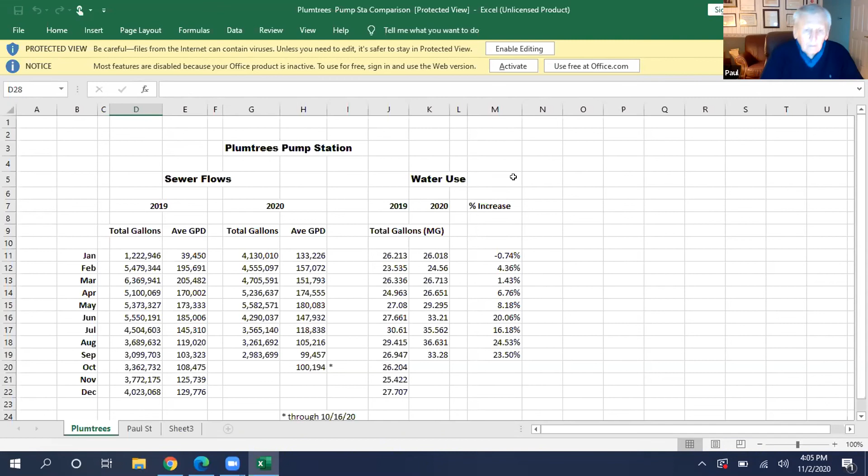Hey Tom, if I'm looking at that right, just use January for instance. We pumped in 2020, 4,130,000 gallons. Is that how you're reading that? Yes, divide by 31 and there's your average gallons per day.

But then over on the water use, is that per day or is that for the month? That would be for the month—that would be million gallons in that month. And again, that's system wide. I don't have the ability to equate only what's going on in Plumtrees; I'm just trying to show the trend in water usage, but that would be million gallons for the month.

All right, that's all. I just wanted to illustrate the flows. That's all. Okay, all right, thank you. Did you have anything else on your report this week?

Yeah, one other item I was tallying up—Kathy, you can move off that. I tallied up the dollars spent on our Greenwood Avenue water main break under the railroad tracks. Still not complete because we have to do the final paving. That's the last item to be done.

But to date, I've tallied up $162,573 on that episode. So I know, Rich, you had been asking about that. Yeah, and I don't have an estimate on the final paving, but obviously we're going to have to pave that to the state specs. Well, they're not cheap. Anytime you're dealing with a railroad crossing, I think Mariusz can attest on some other projects, the cost involved with doing a water main crossing is pretty substantial. But those are my two items on director's report.

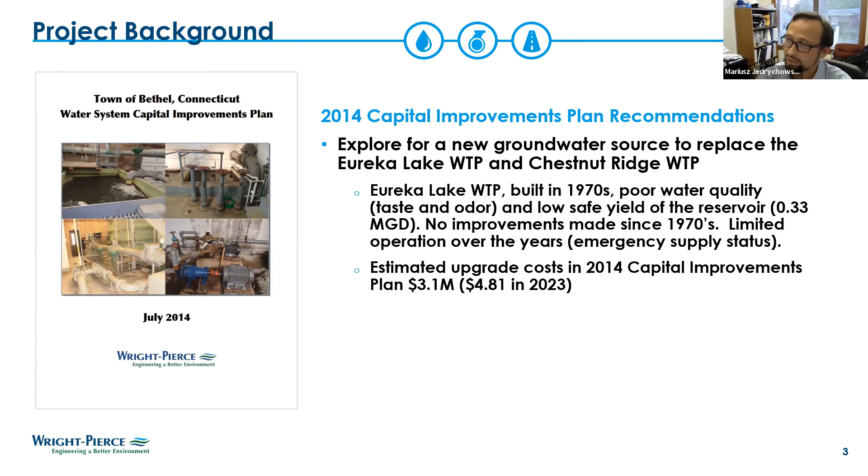In 2014, we estimated the cost to upgrade that plant to be basically $3.1 million. When you escalate the cost to the 2023 year, which is when the Bergstrom well will be online, the cost is basically $4.81 million just for that one plant to upgrade.

Similarly, the Chestnut Ridge water treatment plant was built in 1909, so again it's a very old plant. The building was last upgraded in 1970. Again, it has similar water quality issues, TTHMs. The reservoir has very low safe yield, only 0.17 MGD, so again very little water is available during drought condition, and that's what the state is looking at—how much water you have available when there's no rain coming in. Again, those reservoirs are very small, they have small watersheds. That's the key factor, which I'm going to talk about later in the presentation.

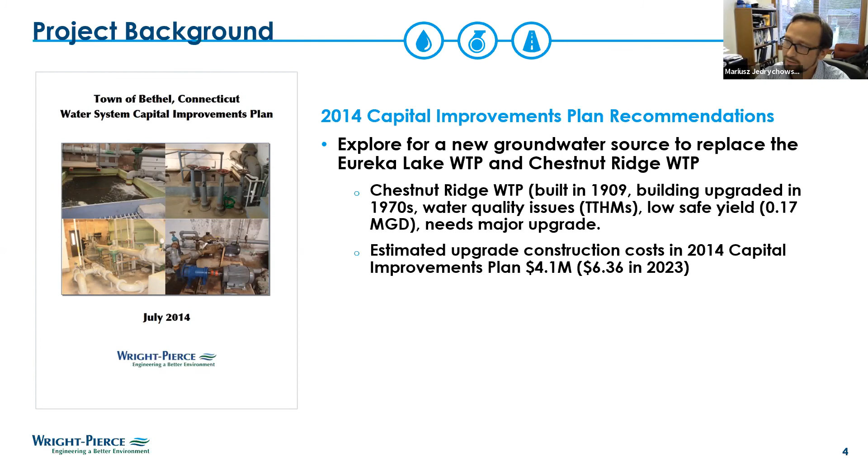The estimated upgrade construction cost that was estimated in 2014 was again $4.1 million. When you bring it up to the 2023 year, to make it equal with the Bergstrom well, it's $6.36 million to upgrade that plant.

So now, in 2014, we basically set on a new path to look for a new groundwater supply. We found a nice source of water in the Bergstrom field. The well was installed and permitted in 2019. It has a very high safe yield and capacity of 1.152 MGD—this is equivalent to 800 gallons a minute. So basically, the one well field would replace your Maple Avenue wells. Each Maple Avenue well is doing 400, so that's about 800.

The cost that we estimated right now is $7.67 million, brought back to 2023, and that includes 20% contingency for that project. However, that would supplement and provide redundancy to replace your treatment plants, but also supplement water to the Maple Avenue wells. But we found some iron and manganese in that source water, so iron manganese treatment is required to be able to run that plant.

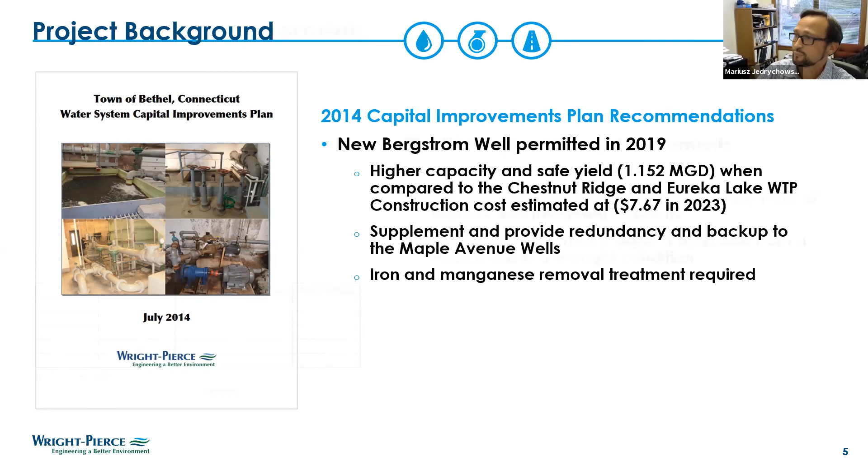Just to show you, we talked about some of the demand in town. This shows the water demand going back to 2010. As you can see, from 2010 to 2020, the water demand has been increasing—it's been going up in town. The 2020 demand is not complete; this is through September, and you can see the average day demand was 1.21 MGD.

Again, this is something that Tom alluded to—a lot of people were home, they were using a lot more water due to COVID conditions, but you can see the average day demand was 1.21 MGD. The maximum day demand in the maximum month in the summertime was 1.35 MGD.

And I guess the maximum day demand was 2 MGD. So again, that demand has been going up. Bethel is growing, there's new people coming in.

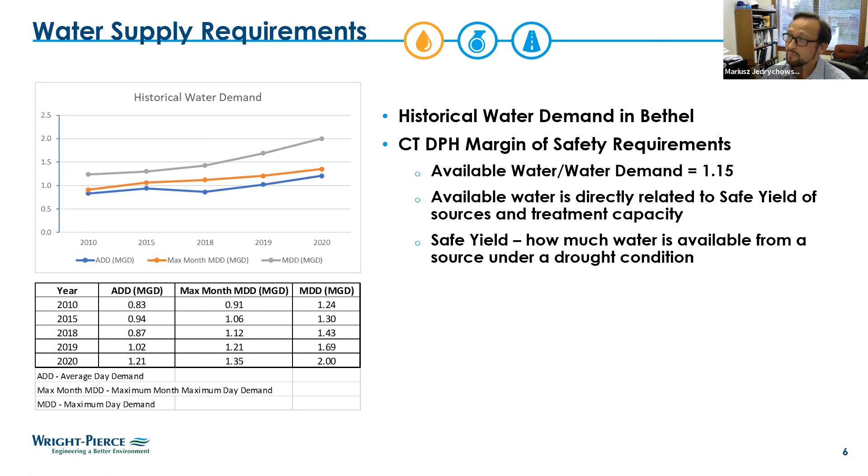So now, why is this important? Connecticut DPH requires water companies to maintain a margin of safety on your safe yield of 15%. That means the available water in your water system from the reservoirs and groundwater, divided by your water demand in the system, has to be greater than or equal to 1.15. So they want you to maintain a 15% margin of safety to provide adequate supplies to your customers. The available water is directly related to the safe yield of reservoirs and the treatment capacity. So, safe yield is how much water is available from a source under a drought condition.

So these two tables now compare your existing sources. Table 1 on top shows the safe yield of your existing sources as they were calculated and approved by the DEP and DPH. As you can see, under the existing conditions, without the Bergstrom well online, the safe yield is 1.66 million gallons per day.

Now in table 2, you can see I removed the two surface water sources, the Chestnut Ridge Reservoir treatment plant and the Eureka Lake water treatment plant. I left the Maple Avenue wells intact and added the new Bergstrom well. So you can see your total safe yield goes up from 1.66 to 2.312 MGD. Really, the Bergstrom well already adds a lot of water to your system that otherwise you would not have available from the two surface water supplies.

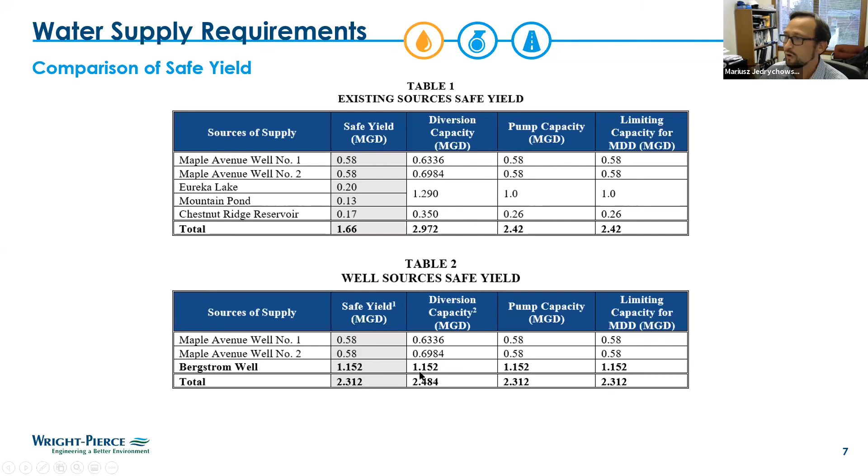And then this table 3 basically compares the margin of safety. The margin of safety, as I indicated, is calculated by the water available divided by your demand in the system. So here in this table, in the upper portion, it shows the water demand in your system from 2010 to 2020.

This shows the available water - this is your safe yield under the existing conditions without the Bergstrom well. And this is the margin of safety calculated for your average day demand. You can see that under your average day demand, that ratio is higher than 1.15, so under the average day demand, you are able to meet the margin of safety under the Connecticut DPH requirements.

Then if you move over here, the state wants you to look at the maximum month average day demand. Again, under the same scenario, you are able to meet the margin of safety with existing supply.

And then if you look at your maximum day demand under a summer condition, when everybody's using water, here you're actually getting close in 2018 - it's 1.16. In 2019 and 2020, it actually exceeded, went less than 1.

So what does that mean? For example, in 2020, basically you had the two sources - your Chestnut Ridge was off, and the Eureka Lake treatment plant was off. So you were operating the Maple Avenue wells at a stress condition. They were basically pumping probably more than they were designed to pump to provide that water during that time.

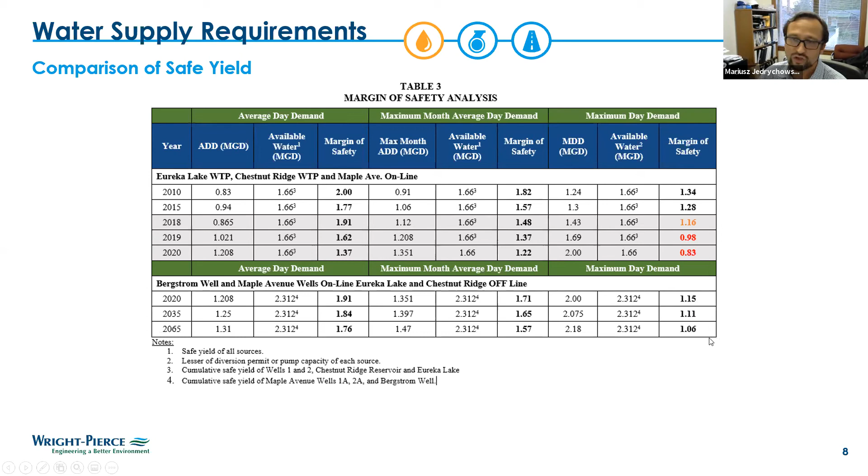So the message here is that both the Eureka Lake water treatment plant and Chestnut Ridge cannot provide the water that you need, and the cost to upgrade them would be much higher compared to the cost of the Bergstrom Well, which is going to be able to provide you the safe yield that you need moving into the future.

And DPH is actually very stringent. They want you to project your safe yield and water demand for the next 50 years. So every 10 years they require water companies to update their water supply plans. At that time, we usually update the water usage and water projections moving forward.

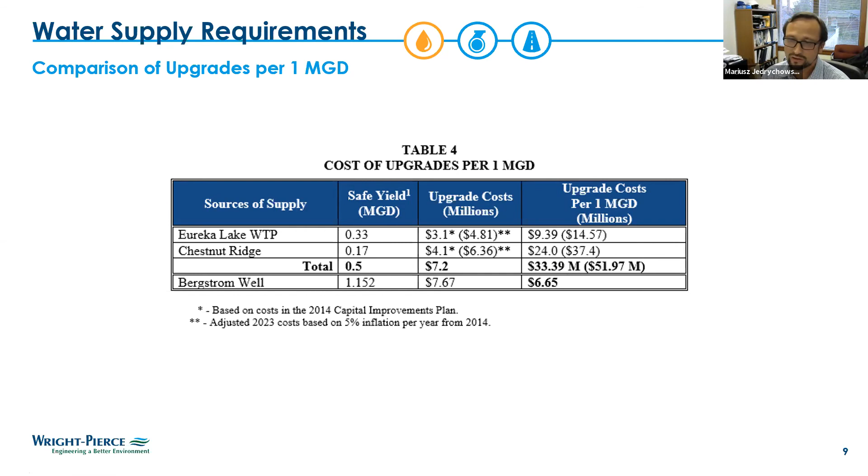So really, I know there's a question raised: how come can we upgrade our surface water treatment plants? Yes, you can, but after the upgrade it's going to be very costly, and you're not going to get as much water as you'd get from the Bergstrom Well moving forward. So even if you do those upgrades, you will still need to look for additional water supplies because you're not going to meet your safe yield in the future.

So just some pros and cons very quickly. If Bergstrom Well is not constructed, you're going to have to make upgrades to the Eureka Lake water treatment plant and Chestnut Ridge water treatment plant, which is very costly. You're still not going to be able to meet your margin of safety, and additional supplies will be needed. There'll be no backup or redundancy to the Maple Avenue wells.

You're probably going to continue doing the annual redevelopment of the Maple Avenue wells, because as you remember, last year they've been pumping very hard, 24 hours a day, 365 days a year, really working hard to produce that water. So if you continue using those wells like this, loss of capacity will continue to occur.

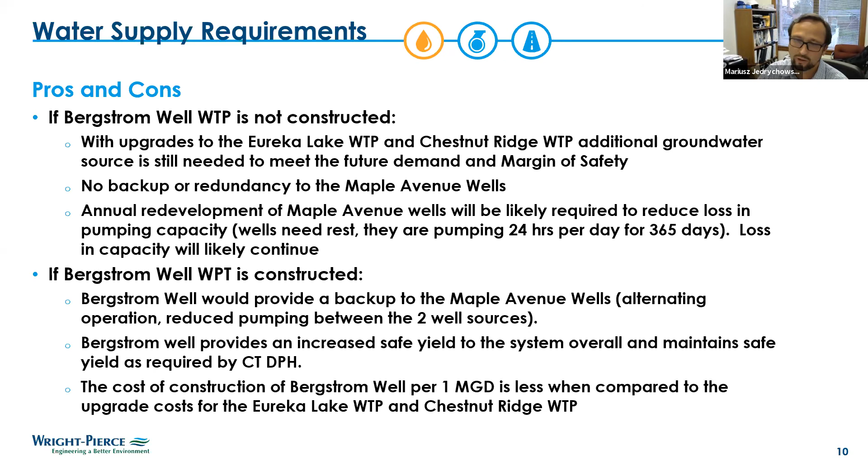If the Bergstrom Well is constructed, it will provide a backup to the Maple Avenue well, so you can alternate operation between the two sources. Bergstrom Well provides increased safe yield to your system, and it maintains the safe yield as required by Connecticut DPH. And the cost of construction will be less on a per 1 MGD basis compared to the upgrades to the other plants.

And then, you guys did a wonderful work. The CIP was done in 2014, and you really have done a lot of really good projects in town.

So there's a lot of work that needs to happen to your system, but you've already done a lot of work, and your major components are already in place after just 5 years. So I think if you move forward with the Bergstrom Well, that's going to basically be the last major project that the town will have to undertake to really be able to provide adequate water supplies moving forward.

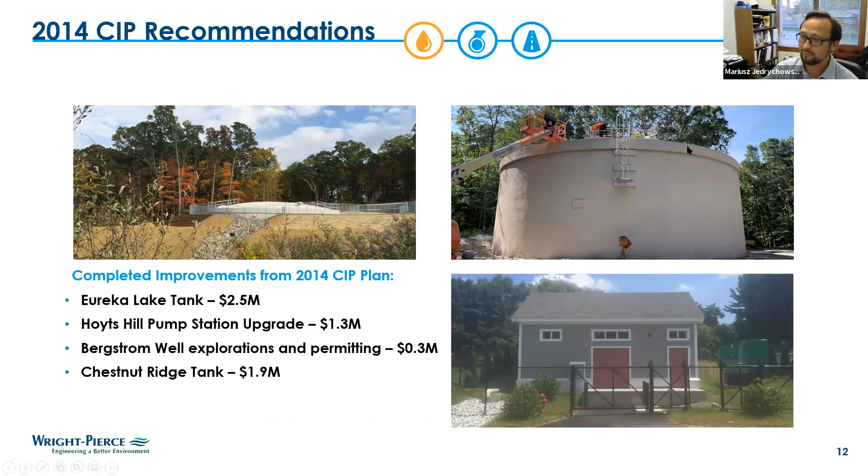Some of the projects that were completed: the Eureka Lake Tank, $2.5 million; the Hoyts Hill Pump Station, $1.3 million; the Bergstrom Well exploration and permitting, $300,000; the Chestnut Ridge Tank, under construction, $1.9 million; the South Street Pump Station, $650,000; and the Briar Cliff Pump Station, $750,000.

Again, all these projects—you've done a lot in the last 5 years. If you add it all together, that's about $12.5 million that you guys already spent in the last 5 years on the major projects in town, which will really bring the system forward into the next century.

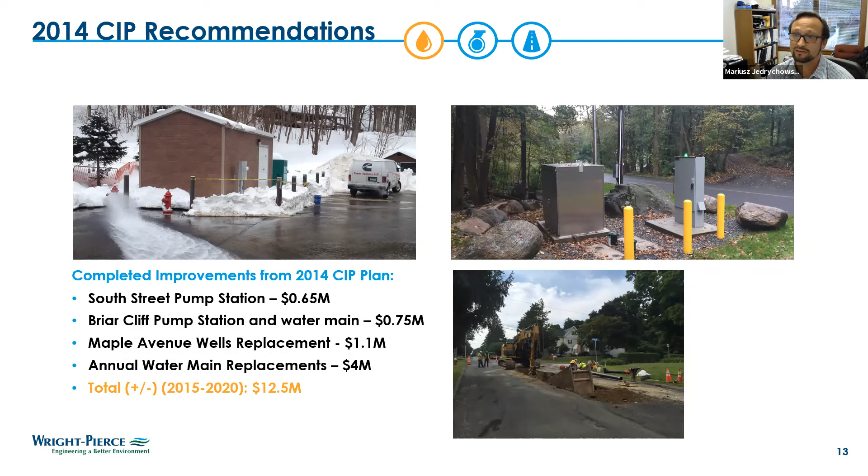So again, the last upgrade is really the treatment plant, because you need additional water. That'll be pretty much the last major upgrade you have to undertake to really make the system work and address a lot of the issues that Connecticut DPH was raising.

Just a little history. The Bergstrom Well was installed in 2019, with an 800 gallons a minute flow. We got all the approvals in place; however, iron and manganese were found, so we need to provide treatment. We conducted the alternative analysis report that was provided to the town in September 2020.

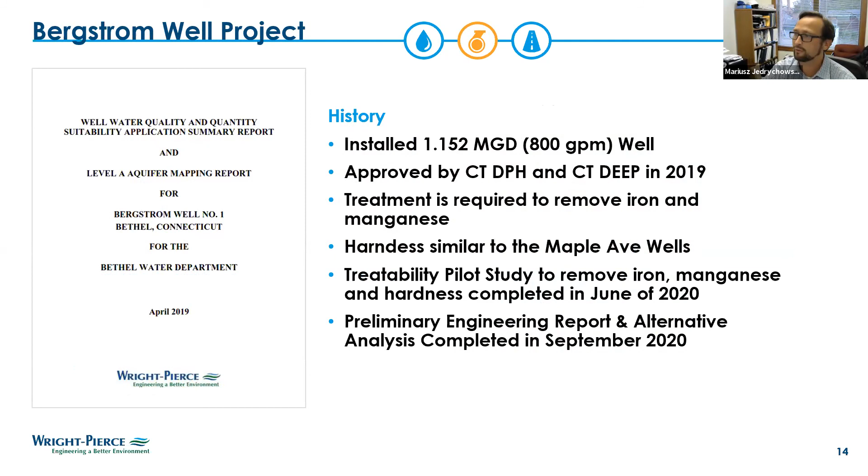Connecticut DPH has requirements for iron and manganese: 0.3 action level for manganese, and 0.3 for iron. In the Bergstrom Well, the manganese levels we found were 0.388 milligrams per liter, ranging from 0.349, so you basically have to treat to remove manganese. The same thing with iron. We didn't anticipate finding iron and manganese; we thought the water quality would be similar to the Maple Avenue wells, which are in the same aquifer, very close, without those issues. Here, we actually found iron and manganese that needs to be treated.

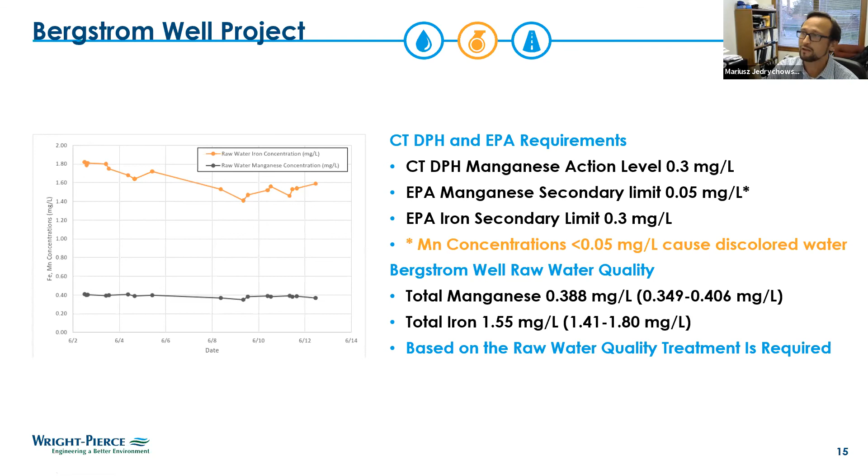I'm not going to go into a lot of detail on these technical slides. With the pilot testing, we're able to prove that the GreensandPlus is going to remove iron and manganese from your wells very well. You're going to get good removal rates, and the process is going to work.

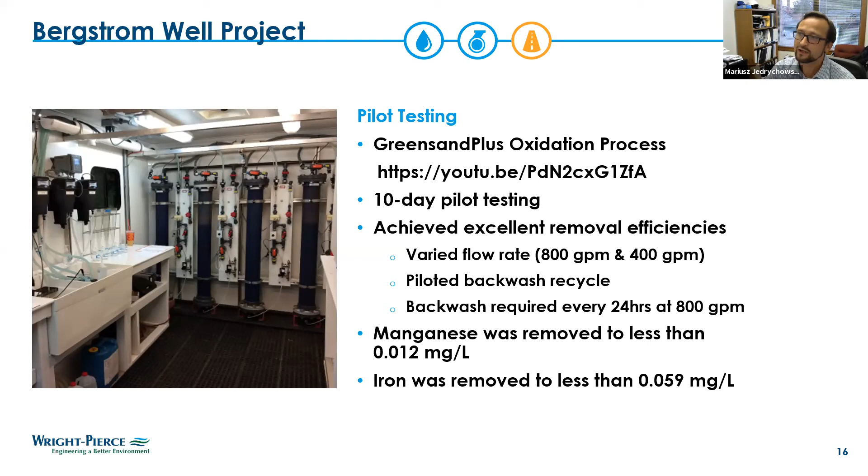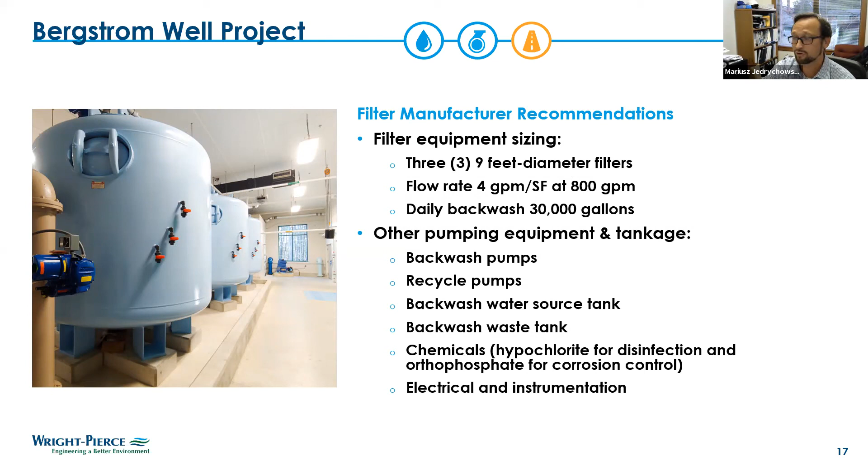We've talked to manufacturers and recommended three filters to remove water and treat it to the levels you need. There was some other equipment included in the report: backwash pumps, recycle pumps, and chemicals. You have chemicals for disinfection and orthophosphate for corrosion control. There's also going to be electrical instrumentation needed for that project.

We talked about recycling the supernatant. Once the flow is treated, there's going to be a backwash generated. There are a couple options for that backwash, which I'll talk about more on the next slide — you can recycle it or send it to the sewer. I have some costs to illustrate how much money you might save by recycling. I know it seems kind of unreasonable to backwash your treated flow.

This is done almost everywhere. It provides a lot of cost savings — it saves water because you don't need to send it to the sewers. If you didn't recycle that water, you'd basically be wasting it, and it's widely acceptable. We conducted pilot testing, which concluded that mixing that backwash doesn't impact your finished water quality. So we would definitely recommend the recycling option for this project.

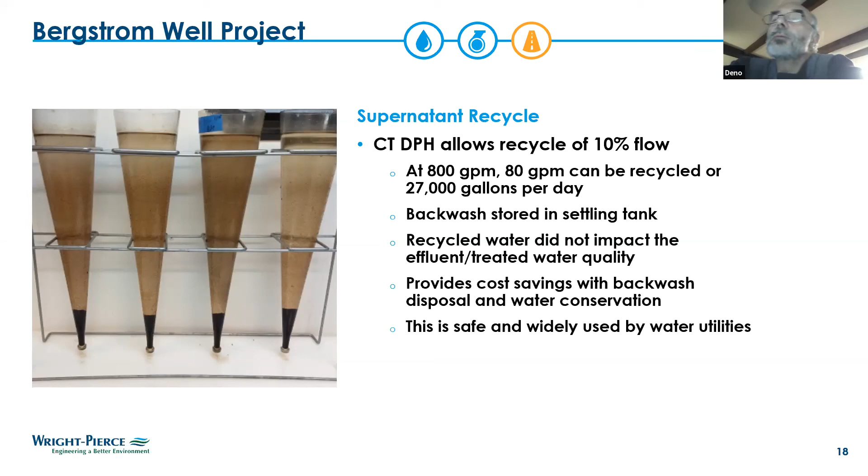Tom, what is Danbury's water flow, do you know? Their sewage flow? I want to say, Deno, don't hold me to this, approximately 9 million gallons a day. Oh, so this is like 0.3% then, on an average day. Oh yeah, absolutely, and they'll have heavier days as well.

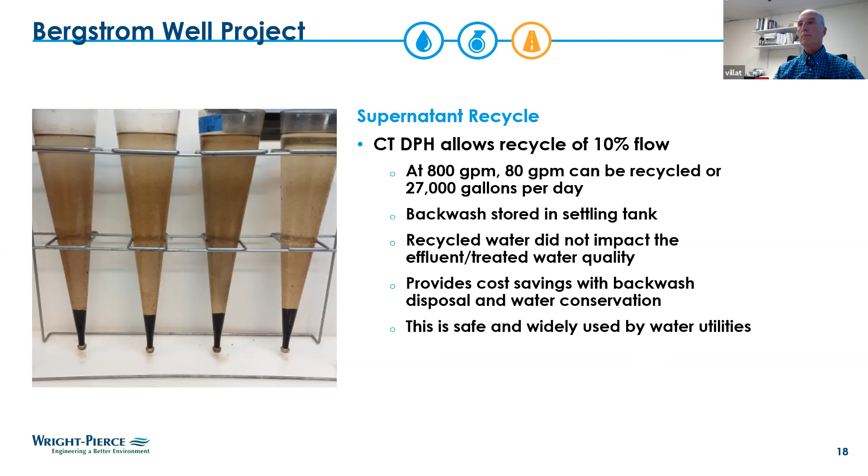Okay, let me move on to the next one here. So again, we've considered four different alternatives in the report. I'm not going to go into a lot of detail for each of the alternatives. The site that we picked was the Bergstrom well site. We looked at the other sites - Whittlesey Drive, Judd Avenue, and Maple Avenue Wellfield. Cost-wise and operational-wise, the Bergstrom well site was basically the winner for the analysis. Let me quickly go through it.

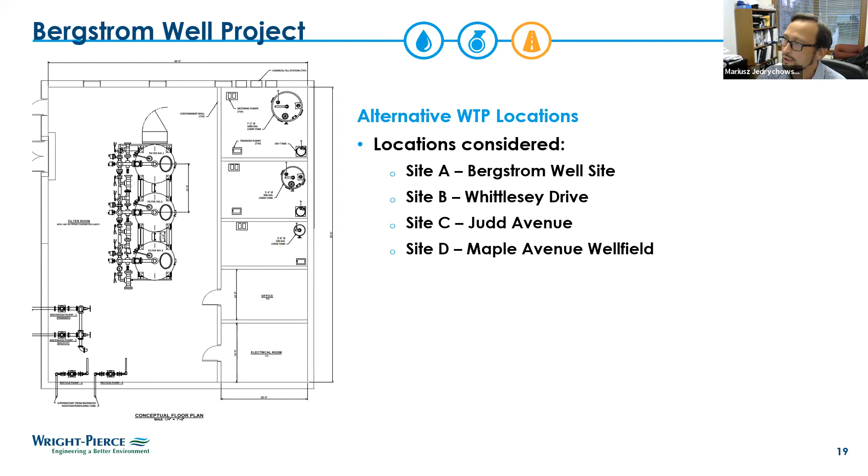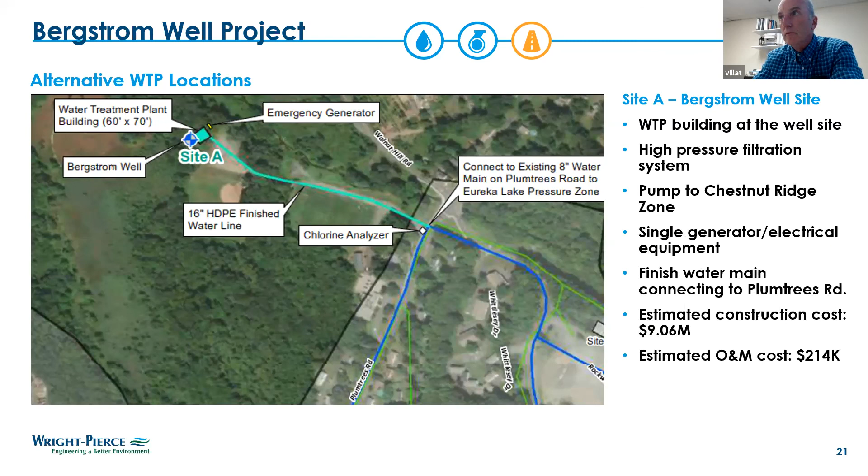Mariusz? Why is the cost of operation and maintenance, O&M costs, go up when you move to a different site? Because this other site includes pumping to the Chestnut Ridge zone, which is the higher zone. So your horsepower of your pumps goes higher. Basically the electric cost related to pumping to the higher pressure zone, because you've got higher horsepower motors and everything else. Okay, thank you.

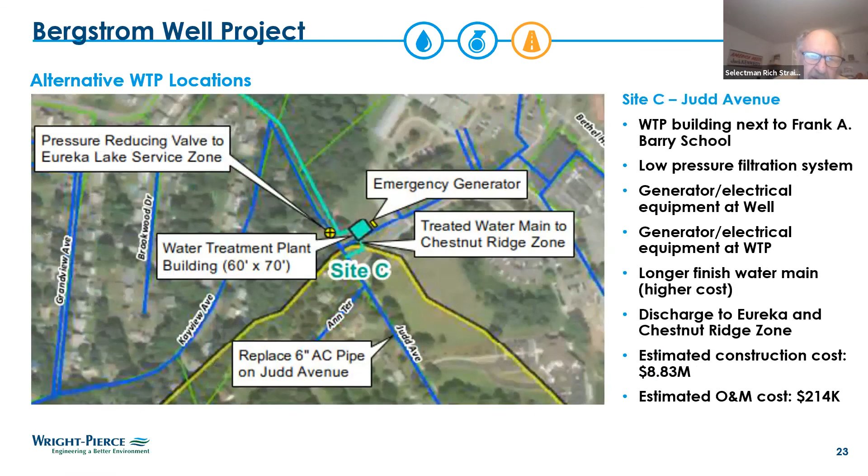Just back to the Bergstrom site there, are we in the floodplain? Would the building have to be raised up higher and everything? Well, outside of the 500, 100 floodplain, we found a little area in there that is going to be outside of the flood zone. So the building right now, again we need to do a detailed survey, Rich, but based on the FEMA maps it looks like we're going to be outside of that flood zone. We might have to do something with the road. I know when it really rains heavily there, I think the road floods sometimes, there's a stream going across the road. So we might have to look at the road, if it needs to be raised, in case - it's not the entire road, it's a small section of the road - whether, if you needed to get to that site during a flood event, you might have some water on the road. Is that included in your cost? That's included in our cost, yes. Okay.

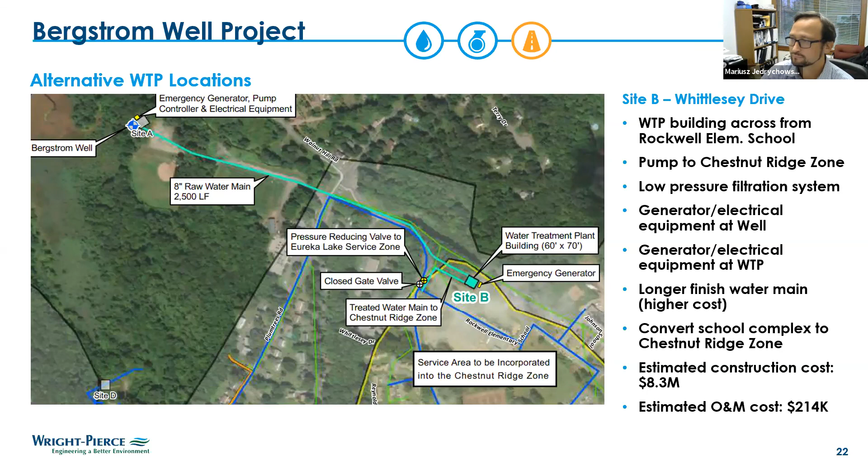So again, we talked about the backwash disposal. I'm sorry, someone had a question again? So yeah, we talked about the backwash disposal cost.

So it's not a lot of money, and I think by recycling you're really saving a lot of water, and then saving your cost of disposal to Danbury.

And then, this project is very expensive. We didn't anticipate we're going to have iron manganese. We hope that the water quality will be very similar to the Maple Avenue wells. It's very close, draws from the same aquifer.

We've done a lot of these iron manganese plants as a company, and we've seen a big increase over the last 10 years. 10 years ago, you could build a 1 MGD plant like yours for about $3 million. Now it's more like $6 million plus for 1 MGD. A lot has to do with building code changes, requirements, fire protection needed for chemical storage and things like that, and increased cost of labor and materials.

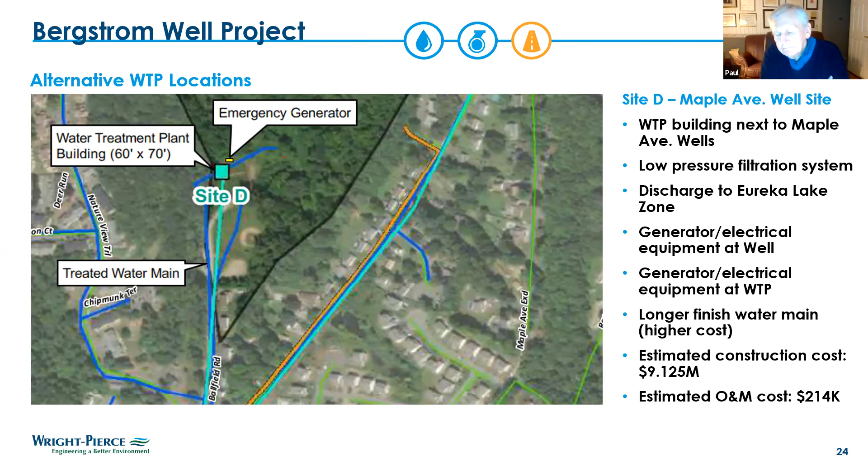Mariusz, when we get to that point, I'd like to see some sketches of how the tanks look on the outside of the building versus if we put them inside the building. Absolutely, yeah, we'll do alternative analysis.

We're going to have workshops with Tom and his staff, and also we can invite whoever wants to participate from the PUC in those workshops to discuss various design options. That's definitely something we like to do, get our clients involved in all the projects to make sure to get input on how all those things get done.

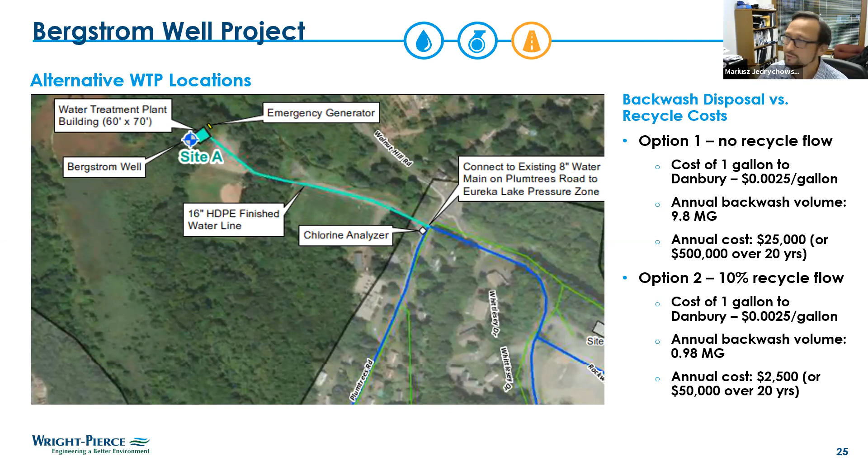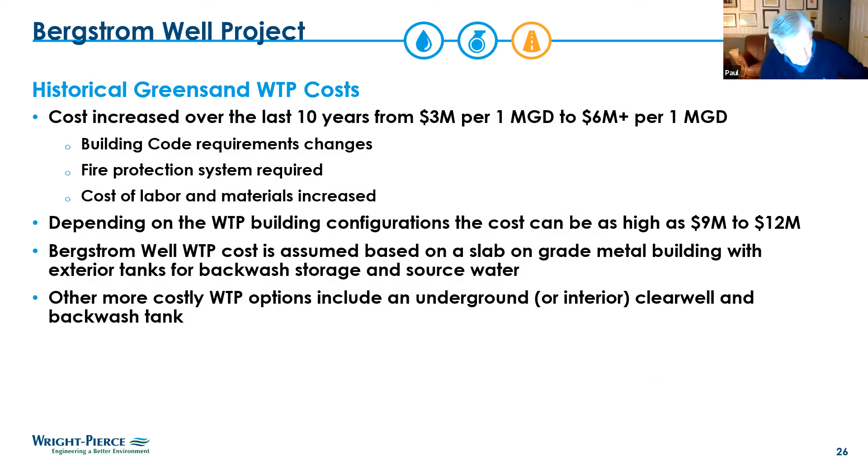Yeah, Mariusz, since it's a steel building, I can tell you we've had experience over at the recycling center with our highway department where the bottom rusted out.

And the recommendation by the individual at the time was to elevate it with concrete.

Right. I mean, I think what's going to be very important, Paul, is really the HVAC system, because you're going to have water sweating in there, and there's going to be a lot of condensation potentially in that building. So you're absolutely right, Paul. That's something we can take care of using HVAC, a proper ventilation system, to make sure that room is dry.

Again, with your car garage, the doors are probably open all the time because the trucks are coming and going. So it's definitely a different environment here.

Here we're going to really ventilate and put an HVAC system to keep the inside of the building dry. There's not going to be that many visitors on a daily basis, probably just once a day or even once a week that people are coming in. So that's something we're aware of, some issues with metal buildings, and we're going to take care of it. Good questions, Paul, thank you.

Two years, yes, and this is very conservative, Rich. This includes review by DPH, review by planning and zoning. Again, we can try to accelerate that, but we've allowed for review time by the town, the bidding and everything else, and the winter shutdowns.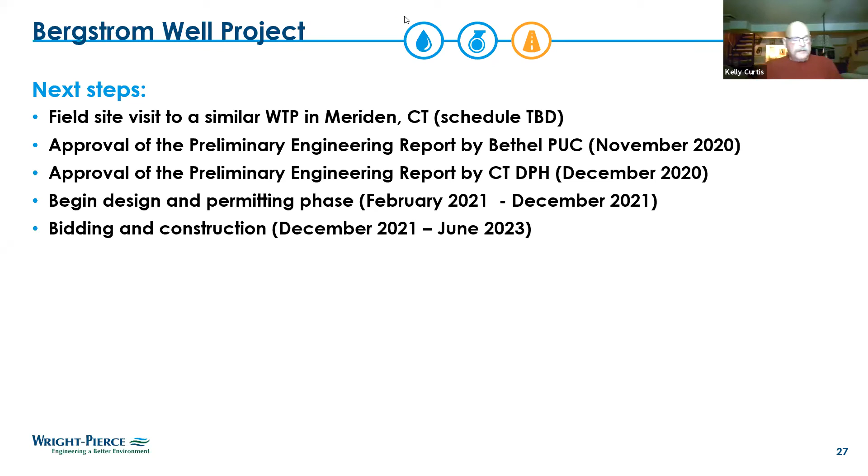We've been discussing that bladder tank up at the top of Briarcliff. Marius had looked into some information. We're looking at between a 30 and 50 gallon bladder tank to put in there in size. My thought is it could be put in a 2-inch meter pit right there on the right of way where we've already got a tap, but we're working on that, trying to come up with different options. We did find a service leak up there today on one of the houses at 25. It's up by the tank site, but it's on her property, so we're meeting with her tomorrow to get that repaired.

The past couple of weeks there's been some paving done. Judd Avenue was done, we had a main break there probably a year and a half ago, and American Paving came in and repaired the road there, as well as Milwaukee, where we did main work about 3 years ago. It started to settle out, so that's been repaved. And Grandview, when we switched all the 2-inch services over to the 8-inch transite main, that was paved from end to end. So those are all taken care of.

I was at South Crossings today, inquiring about what lots are left in there. There's only 2 lots that don't have foundations in there. I'm gonna guess that Toll Brothers will be out of town on those 2 projects, by the springtime. They're moving right along, and all but one is permitted. We've got meters in all but probably about 4. So that's moving along pretty well.